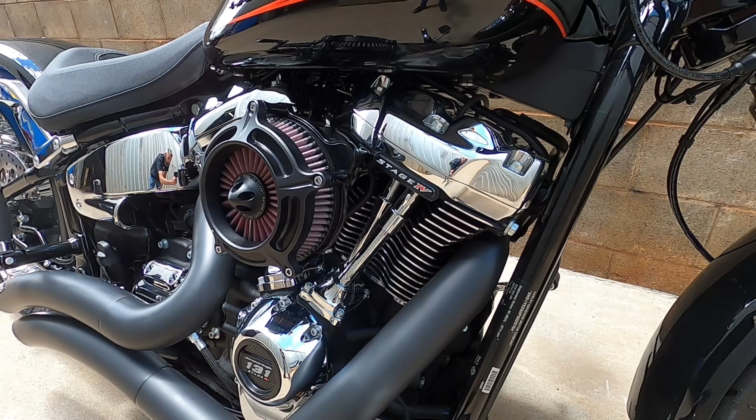I've just finished this awesome breakout build for Shane. He's brought it up to me from Brisbane to do this build. He wanted big cubes and a lot of noise. So today we've gone with the 131 cubic inch kit from Screamin Eagle, and I've opted to go for the CR483 camshaft. The reason I've gone for that camshaft choice is Shane loves the look and sound of the V&H Big Radius pipes. Because he wanted an awesome idle sound too, that's exactly why I chose the 483. A lot of you guys know that cam has that idle a lot of you folks are after. So today's combo, I'm really excited about how it's going to come together because I know the idle's going to be good sound, and this thing will produce an awesome amount of torque from the get-go and carry right through to the mid-range. So let's get into it, folks.

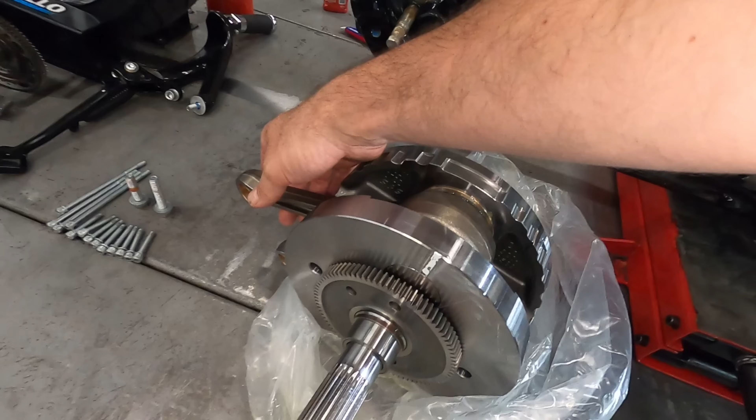We've got a lot going in here. We've got a S&S flywheel. We've got some air ride suspension. We've got a lot of other stuff to do too. Probably a lot of it we won't cover in this video because I want to keep it about performance rather than accessories and things. So I may do a video on that later on, but for now, let's get into this build.

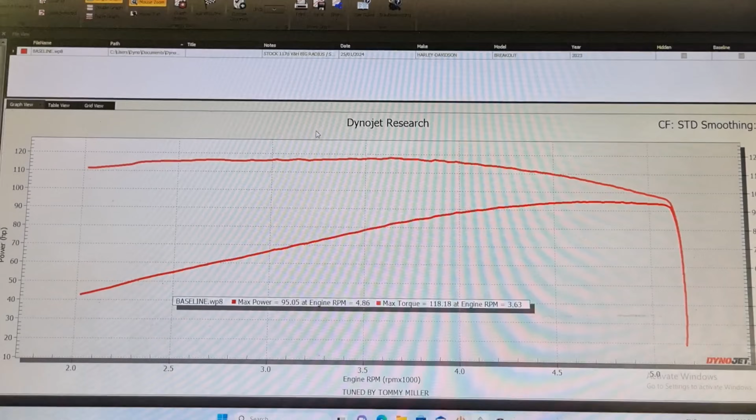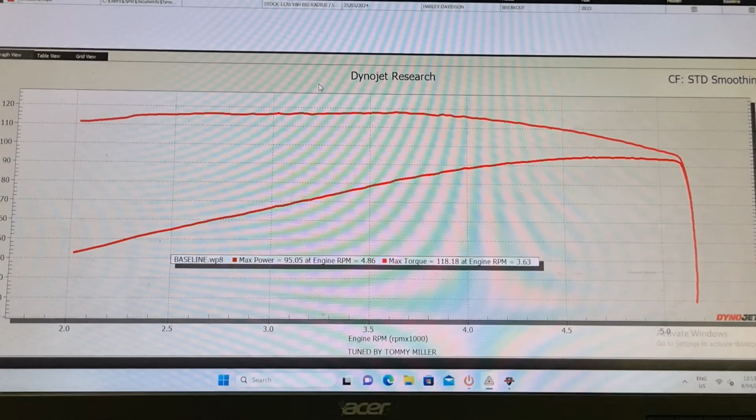So this thing, guys, it rode in here making 95 horsepower and 118 foot-pounds of torque. Now you can see it's quite a nice looking graph, just a basic stock looking graph as far as a Harley's concerned. Nice flat torque curve you can see at the top there, and again, built-in speed limiter, just factory because it hasn't been tuned. Pulling up there at just over 5,200 RPM. So that is what it is there as far as the stock configuration was concerned. It's of course now a 131 with the 483 in there, and let's get this thing up on the dyno here and see what it makes.

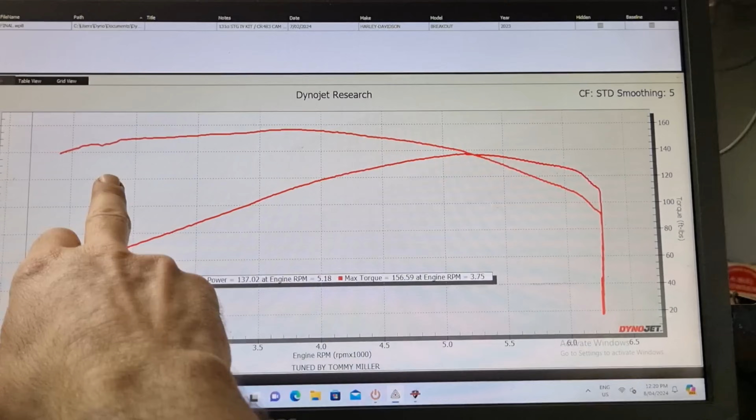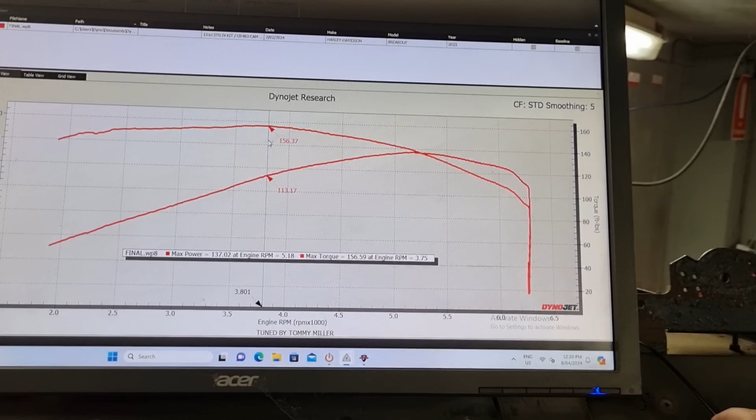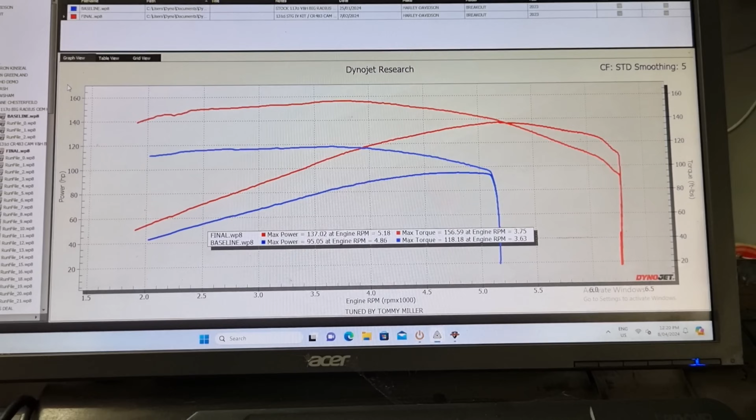Have a look at that result, folks. What a massive amount of torque early on. Check this out here - at 2,000 RPM, we are making 142 foot-pounds of torque. And from there, it's just a beautiful, solid graph all the way through, right to the mid-range there. Peak torque's at 3750 at 156 foot-pounds of torque. That is huge torque. Guys, if we compare this to the baseline, check that out. What a massive difference. This thing is going to feel like it's on steroids because it essentially is. It's got that 131 in there now, with that 483 cam.

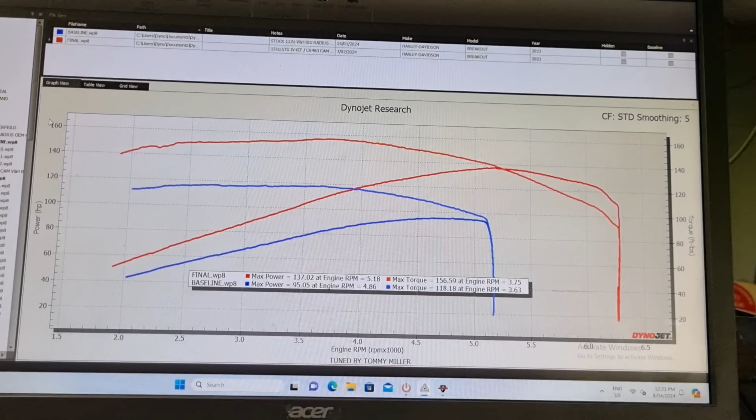It sounds great. It has got the perfect amount of torque. Shane said to me he loved those V&H pipes and how they sounded, and they sound even better now out of this with this 483 there. But guys, that result is exactly what I wanted for Shane, because I wanted that huge torque in early, right in the mid-range. That's exactly what he's after, because he's not really wanting to rev this thing out. He's not really chasing those big high horsepower numbers. I'm about to take this thing for a test ride myself before I do a few checks on it, and then I'm giving it straight back to Shane. He's going to take it for a ride, and we'll get his first-hand thoughts of the bike. So let's dive straight into that.

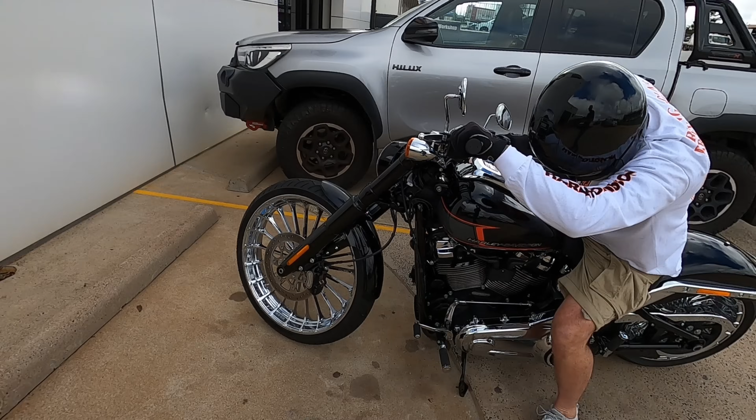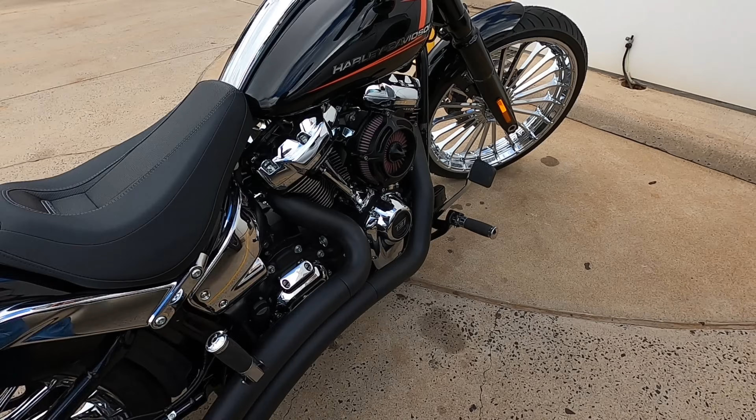What do you reckon of that? Oh, awesome. Give you a fright? Awesome, love it. He's real good. That's awesome, mate. I would encourage anyone to get this kit. Yeah, 100%. I remember when I was talking to you about it, and when you said what you wanted to do and the pipes that you had, because you didn't want to go away from those pipes, which is fine, but when I decided we'd do the 483, I knew that combo was going to be exactly what you wanted. So, I'm more than happy. That's awesome, mate. So good. It looks so good with those turbine wheels. You got the 23 inch on the front there. Yeah, it looks so good. But man, that engine is muscle. That is so good. Awesome, mate. Awesome, glad you're happy. You've done an excellent job.